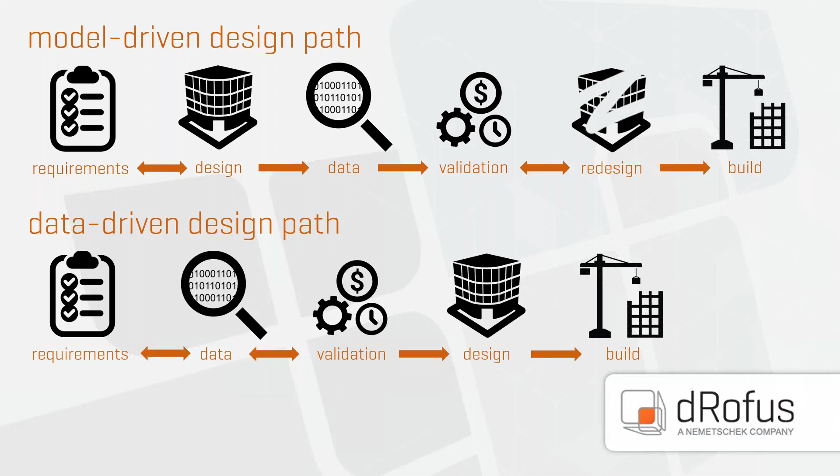I think what we're talking about now in the industry, and what dRofus does very well, is this idea of creating the data first, and validating that the data meets the project requirements before we start building models. So you'll see in the industry people starting to use Dynamo quite a bit, the concept of generative design—all of these are focused around creating information and then developing models off that information. Again, that's what we do really well.

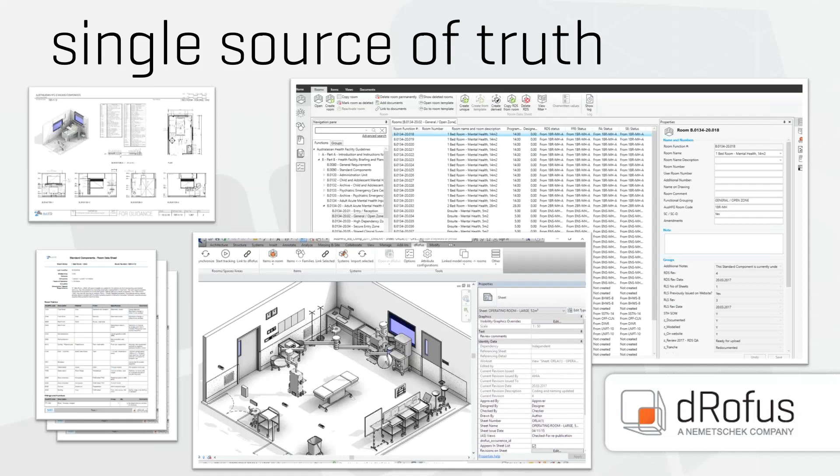What dRofus can be, and hopefully I'll show this to you in the demo, is we really want to be your single source of truth for information throughout the project lifecycle. So as various team members use different tools, the data is consistently hosted in a single location.

The way dRofus works is we're built on a bunch of different modules, and the various modules support different activities depending on your role in a project environment. We're not going to go through all these modules today. What we are going to focus on is some of the more upfront design-focused modules, because they set the stage and give you a taste of what dRofus can do throughout the entire lifecycle of the project. If there are specific modules you're interested in, we can follow up later with those demonstrations. As I mentioned, we want to be that single source of truth.

The way the software works, we are a cloud-based solution. Our licensing is structured so that any single user on any organization collaborating on a project has access to the same shared information. Based on user permissions, people can view or edit information based on how you define their access. At the end of the day, we want to be that connection either through open standards like IFC. We do a lot of importing and exporting with Excel, but we also have direct plugins to BIM authoring tools like Revit and Archicad. So regardless of the tools team members use, if they support open standards, we can essentially be that glue that holds the whole team together.

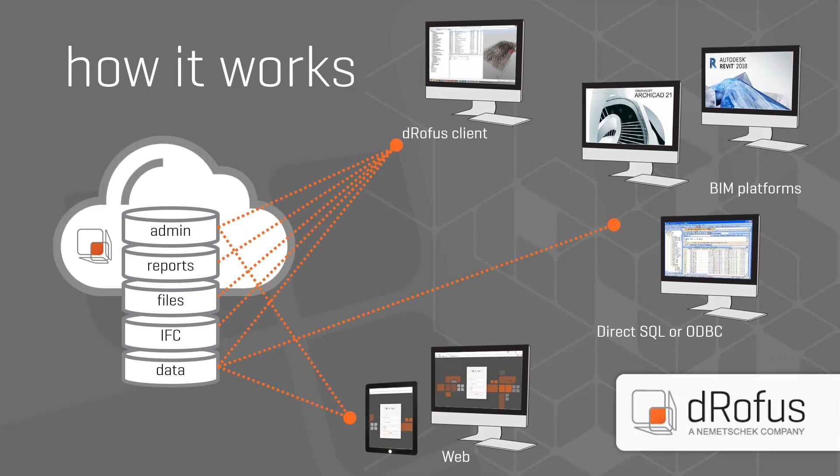The way our software is deployed is pretty simple. There's a desktop application that gets installed on every user's machine. When that desktop application is installed, it will automatically install the plugins for the various BIM platforms. There's also direct access to some information through a web interface, and we'll show you all of those in today's demo.

Okay, with that, I'm going to go ahead and get into the demonstration. So I'm going to close this down. You're looking at the home screen for dRofus.

When you log into your project, the home screen gives you some high-level project information, some key metrics in a project, and you can see the users that have been involved in this project. Off on the left are all of the different modules.

As I mentioned, we're not going to talk about all these today, but I'm going to start with the Rooms module. If I select that and open the Rooms module, this is the user interface, fairly consistent throughout all the modules. You'll see your navigation pane on the left, your ribbon on top, your main workspace in the center, and some dialog boxes out on the right.

At the core of dRofus is rooms. The way we work is you think about creating your rooms, defining where those rooms live inside of your building, and then defining what we call items, which in dRofus is anything that would go into a room: furniture, fixtures, equipment, mechanical, electrical items. You then assign those items to rooms inside of your program, and we synchronize all of that with your Revit models, and you can build on that information.

In the Rooms module, you can see in the navigation pane on the left there's the functional structure. This is fully customizable by every project team. In this case, we have departments and in some cases sub-departments. This can be customized - how these departments are named, numbered, the number of levels. You may have a multi-building project on a campus, so you can have a campus, each building, departments, and sub-departments inside of those. This is completely customized and defined by a project team.

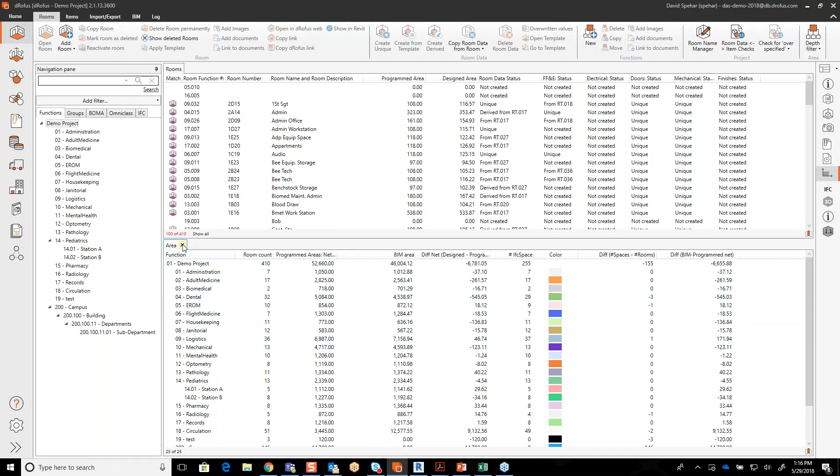I'm going to close that. Next, I'm going to talk about a different department. If I select any of these departments, you can see that I quickly isolate all the rooms that have been assigned to that department.

There are other ways of grouping rooms. We can group them by levels, or create custom grouping queries. Once you have all your rooms inside your project, you can create different ways of viewing and grouping them, but the most common way is by department.

If I select my department and open up my properties palette, I'm seeing the properties for this department, where I define the name, number, department gross, and area net factors. I can put in efficiency factors on a department by department basis, so for very early planning and programming, before I even build a model, I can look at what my net areas per department are versus my gross requirements. That's at the department level.

One common theme throughout dRofus is the ability to attach images and documents to just about anything in your project. In the case of our department, if I select my documents, you can see I have a PDF here, and I'll go ahead and open this up.

This PDF is the design guidelines for a dental office layout. So if you have your own standards, or a specific client with their own specific standards, those can be attached even at the department level, so as your team is designing a project, they can see what requirements they're designing against.

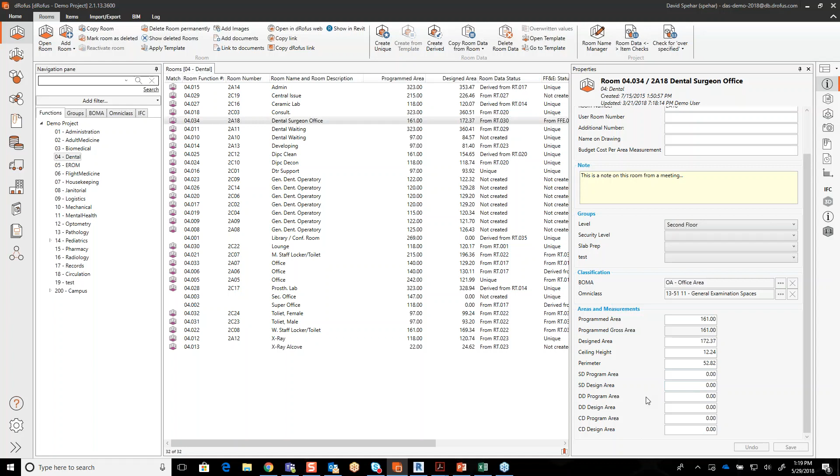That's the core properties for a room. I'm also going to open up my room data interface, and this is where you now start to capture all of your design and functional requirements for your rooms.

These tabs, the fields of information inside them, are also customizable and defined by you. So if you have your own way of managing and capturing room data, or an owner with standards for how they want room data sheets created, all of this can be customized in your project. You can see we're capturing various pieces of information, from the design build requirements to all the different mechanical and electrical systems.

So that is the room data for this room, and that's also the properties. I'm going to go ahead and open this room. When I open it, you'll see that it's just another way of accessing the properties, another way of accessing the room data.

We can also see we have images. This is the floor plan image of this room coming from the Revit model. So if I'm someone that doesn't work inside of Revit, I can now see how my Revit model is evolving, and as the person doing the planning and programming, I now have a direct connection between the two. You'll also see we have these other headings here.

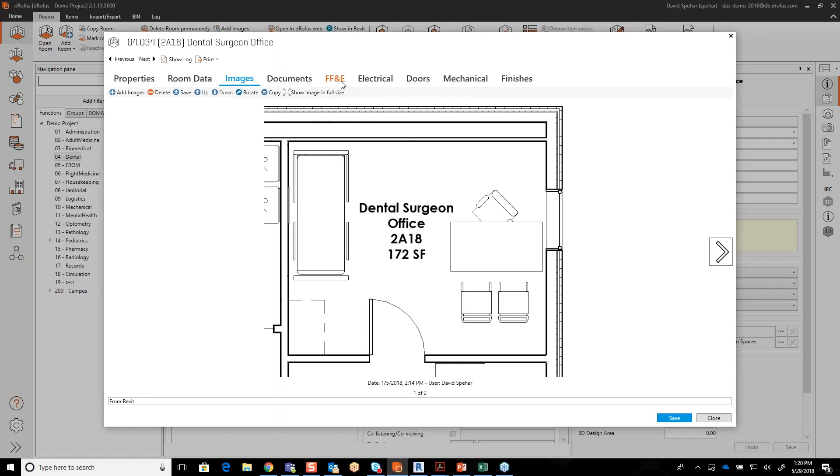These are what we refer to as item lists. As I mentioned, and we'll talk about items next, as you create items inside of your database, you then assign those items to your rooms. When you assign those items to the rooms, they're now tracked as part of the requirements for those rooms. So in this case, you can see this is all the FF&E planned for this room. If I go to finishes, you can see these are the finishes that are planned.

So now the various team members can start to define their requirements inside of a single platform. I'm going to go ahead and close that room information. The next thing I'm going to do is talk about items.

Actually, before I do that, I'll take one step back. Obviously this is a project that's fairly far along. There's basically three ways that you can create a project inside of dRofus. You can create it natively right inside of the platform. You can see right here, I can create new departments, new sub-departments directly inside of dRofus pretty easily.

I can also add rooms. I can add them from templates, which we'll talk about in a moment. I can just add a new room, or I can copy rooms if I want to. So there's a very easy, efficient way to build your program inside of dRofus.

We realize that not all teams work that way. I know there's a lot of people that still really like working in Excel and are comfortable in Excel. That's fine, we can import—as I mentioned before, we work with Excel all the time. So in our import-export utility, I can import rooms from an Excel file.

Basically, I can take an Excel file and then decide which of the attributes inside of dRofus I want to populate from columns of information inside of Excel. So it's very easy to bring this information into dRofus from Excel.

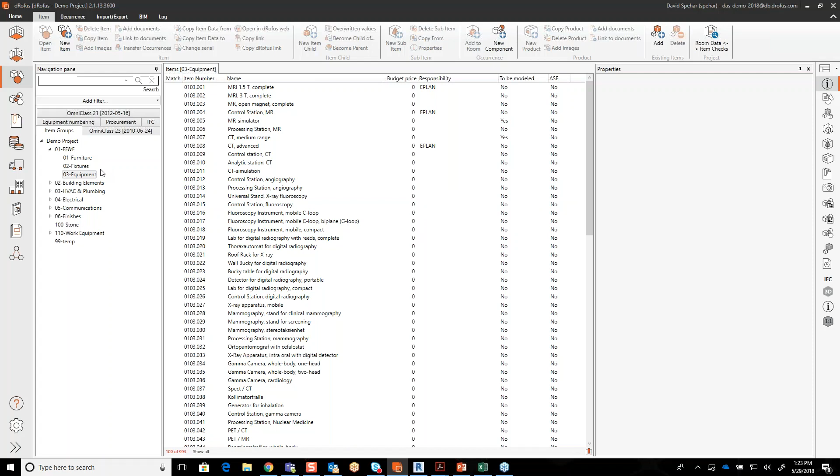Similar to the way we group rooms inside of our functional structure of departments and subdepartments, we can now itemize and define how we want to organize our items in a project. This is fully customizable as well, so you can have as many item groups and subgroups as you want. You can see in this case we've got the item groups organized by FF&E, building elements, HVAC, etc., with subgroupings underneath those.

So again, any one of these groupings that I select isolates the items that have been defined to be part of that item group. If I go into my equipment group, for instance, and select this CAT scan, you'll see that similar to the room properties, here's now the item properties. For those of you that work in Revit, this is very similar to looking at the parameters or properties for a family.

So in this case, I have my item name and other pieces of information, like budget price. This is great because you can put in a budget price for every piece of equipment or every item in your project. Every time that item is assigned to a room, we track that and you can report on it. So you can start to get very reliable budget gut-check pricing information based on the budget you define for items and where those items are placed inside rooms. This can become a very powerful tool during design for rule of thumb cost validation.

The other attribute I want to note here is this 'to be modeled' checkbox. This is where we decide how you want to relate items in dRofus to families inside your Revit model. If you want this item to live as a physical piece of content and geometry in the Revit model, you select 'to be modeled.' What's great about this is it allows teams to be more strategic in their modeling. A lot of people model everything just to create schedules in Revit - I was guilty of that myself. But there's stuff you may not want or need to model, yet still want to track as part of a room. In that case, you don't have to check it to be modeled. Things like artwork or a trash can, items that aren't dimensionally significant but still need to be purchased as part of your project. So we give you the ability to be strategic in what you choose to model.

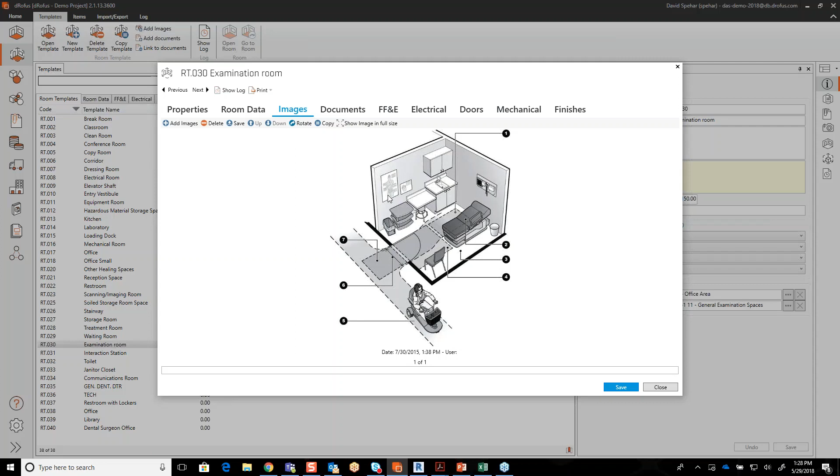I can also attach images and documents. So maybe I want to attach an image that is the standard layout for this type of room, whether it's from a design manual, hand sketches, anything you can create an image file for, you can attach as a standard image for your templates. I'm going to close that. In addition to my room templates here in the template module, there were all of these other item lists.

So now I can start to template the items that get assigned to rooms as opposed to just doing it manually. If I open the template for my FF&E, here's a dental office FF&E template, which says this is all the equipment from an FF&E standpoint that should be assigned to every single dental office. So now you can standardize not only your design and functional requirements for your rooms, but also what goes into those rooms.

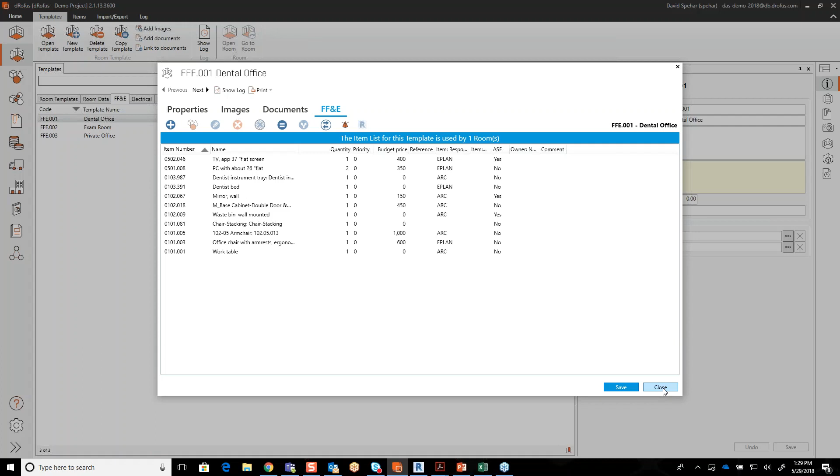You see there's FF&E. We also can do that at the finishes level, so I can start to template which finishes I want to associate with my rooms. I'm actually going to show you that now.

If I go back into my rooms module, I'll close down the room, actually let me keep the room data open. Now if I select this handful of operatory rooms, you'll see my room data interface shows that this hasn't been created. In my workspace, it shows all these columns of the status of these different item lists, and in all of these it shows it hasn't been created.

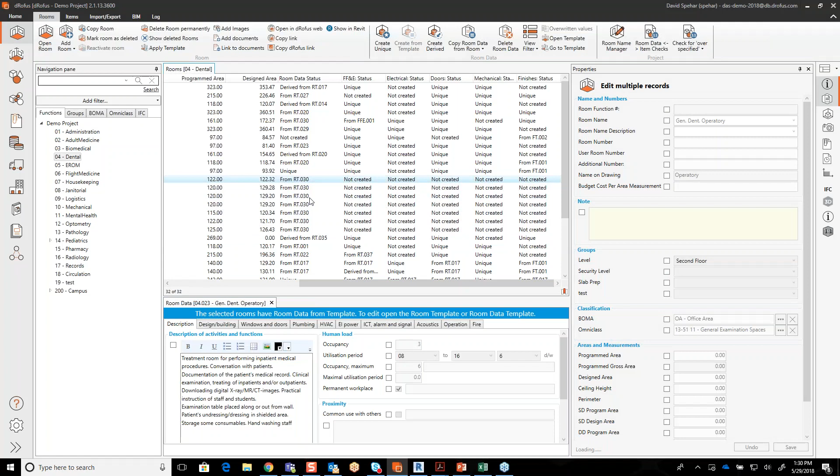So for my room data, I'm going to select Create from Template, and now it brings up my room templates from the other module. I'll scroll down and select this examination room. Now you'll see the status changed from not created to being driven from a room template.

If I double click to open this room, you'll see there's my room properties, there's now all of my room data showing it's coming from room template 030. My images now show the floor plan of this room coming from the Revit model, but there's also the image showing the design standard.

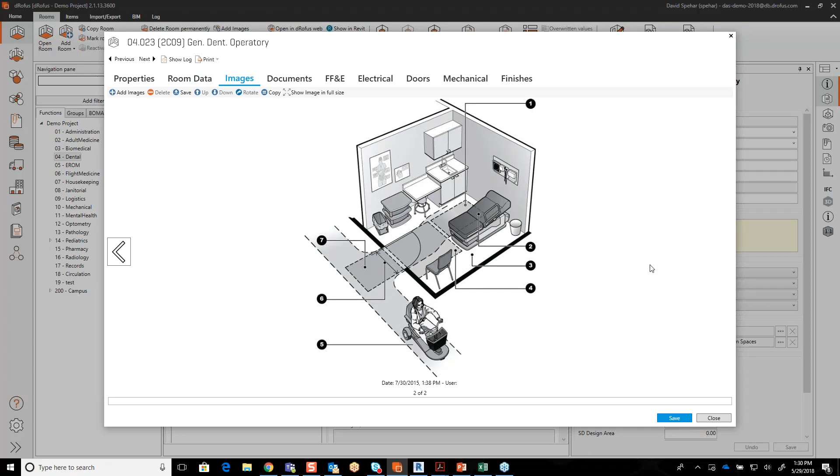So again, as a non-Revit user, a planner, architect, project manager, owner, or contractor who needs to make sure the models are evolving to meet the design requirements, they can see all that inside dRofus without ever having to open up a Revit model.

In addition to that information coming from the room template, if I select my FF&E or finishes, you'll see it showing the status—they haven't been created yet. So I can create unique, which means I'm just going to define this as a one-off room, let's say a lobby or something like that.

I can derive it from another template, or copy it from a room, but in this case I'm just going to create this also from a template. So I'm going to go to my finishes and grab my dental office template. Now when I select that, all of those finishes we've defined in our template get pushed into these rooms. It's a very efficient way to create your design requirements and associate that with all of your rooms in your project.

One other thing I want to show you before I jump into the Revit side of things: if I open up my room template again, we track every move people make inside of the database, which is super handy because now you have an audit trail and the ability to see how your project's evolving.

Even if I select this room template and go to show log, it's going to show me the history of every change that has taken place in this room template since it was created. It shows the fields that changed, old versus new value, when they changed, and who changed them, giving a summary of all of that.

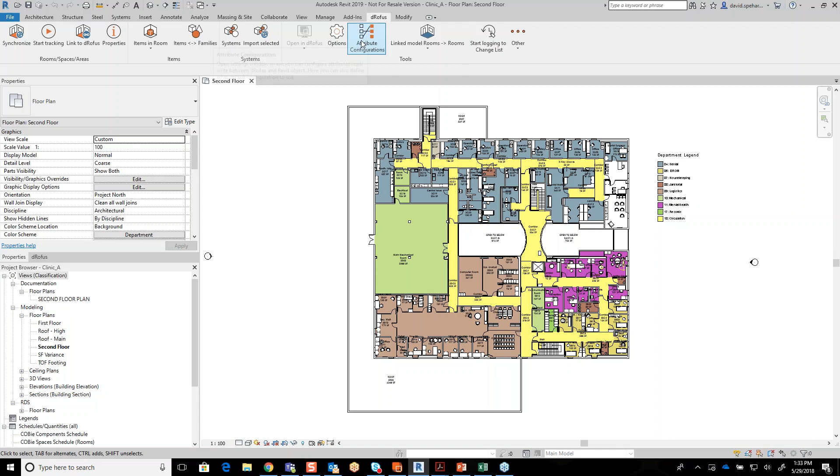Now inside of Revit, when you get the desktop application you'll also get the dRofus plugin. The first thing I'm going to show you is the attribute configuration, which is where we decide how dRofus is going to communicate with Revit. Your BIM manager, or whoever the data manager may be, will define all of these for the project team.

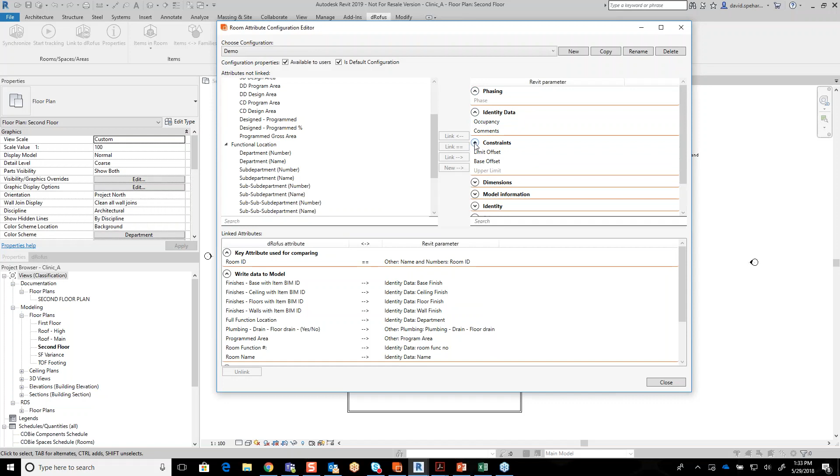I'll start by showing you the Revit room to dRofus room attribute configuration. Here you'll see all of the dRofus attributes on the top and on the left, and on the right all of the Revit parameters. These are Revit parameters—either out of the box, shared, or project parameters—and as long as they're associated with rooms, we have access to them.

On the top we show you the parameters that haven't been connected, and on the bottom we show you your current configuration and which way the information is flowing—all the data we're writing to the model from dRofus, and all the data we're writing to dRofus from the model.

In this case, we're pushing our finishes information, department, and program area into Revit. But on the Revit side, we're pushing the actual area of the room, the level of the building, and the dimensional data back into dRofus.

You can create multiple configurations. As mentioned earlier, one way teams start a dRofus project is by building a conceptual Revit model and pushing fields of information from Revit into dRofus. You can have a configuration that does that, then save it and create a different one that pushes the data the other way—supporting different workflows for how data flows back and forth between dRofus and Revit. So I'm going to close that.

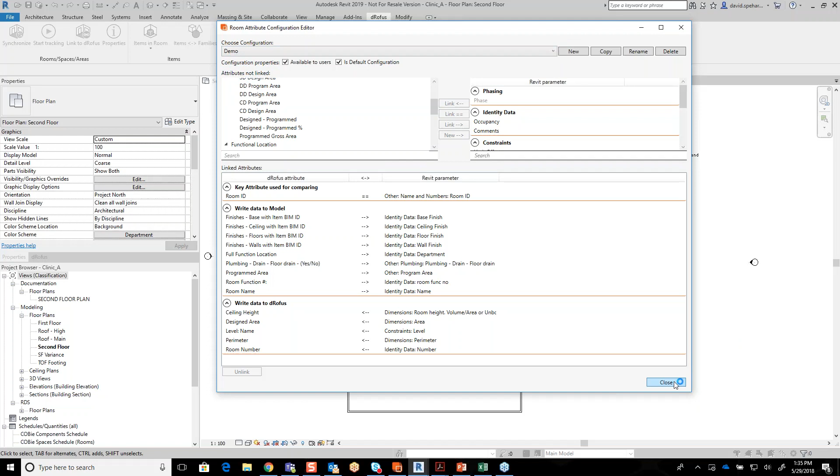The same holds true for Revit systems, families, and areas—I'm not going to show you those right now in the attribute configuration, as they're all fairly similar. What I do want to show you is a couple of features of how we interact with Revit in both rooms and items.

I'm going to zoom into this corner of the building. You can see we have a few rooms that haven't been placed yet. Now I'm inside my architecture tab, and I'm going to go ahead and place a room.

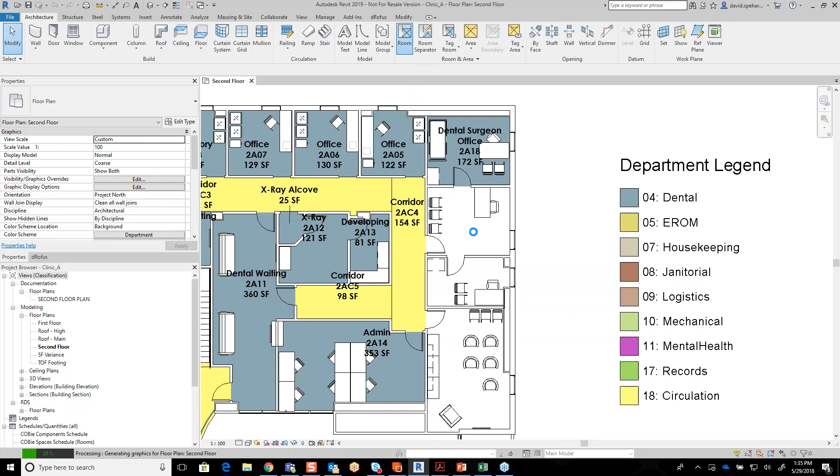When I do that, we intercept the Revit room command and bring up our own dialog box. You'll notice on the left is the functional program, so there's all of our departments, sub-departments, etc. Inside of those, as you select the various departments, we will show you which rooms haven't been synchronized to a Revit room yet.

If you think about the different workflows, if you start building your program inside of dRofus before building Revit models, which in many cases may be the ideal, you now can make sure that every room you place inside of Revit is part of your program. In this case, you could see that in the dental department, we have 3 rooms that haven't been placed yet. So I'm going to grab this room and I'm going to link it.

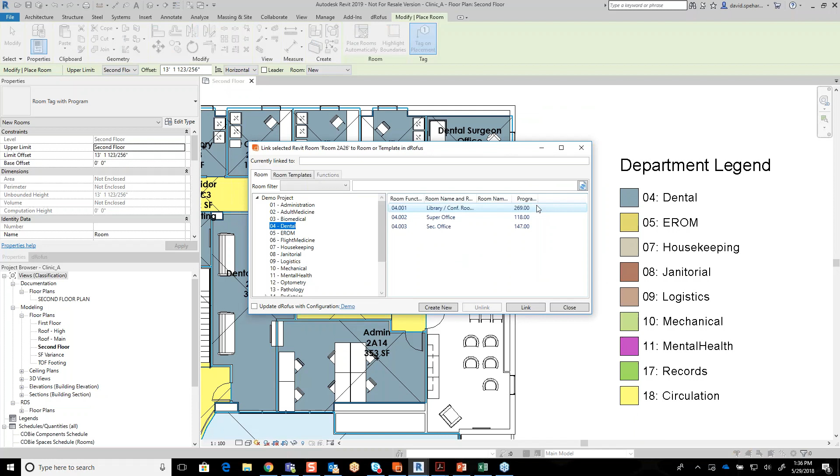And now when I do that... I'm going to close that. Uh-oh. Well, that's always fun. Don't you love a demo? There we go, not sure what happened there.

Okay, apologize for that little hiccup. I am using the beta version. Unfortunately, I shouldn't be, but that's what I have on my computer.

But as you can see now, when I place that room, if I go ahead and select it and look at its properties, this is all the information that we said we're going to push into Revit from dRofus.

Now what I can also do is, if I go back to my dRofus tab, you'll see there's the properties palette here. If I open that, now what I have is the Revit properties palette that shows me the Revit side, but I also have the dRofus properties palette that shows me the information from dRofus, and it's showing me arrows that identify which direction the data is being pushed and pulled. So now as a user, I can see which fields of information are actually synchronized between my Revit and dRofus models.

The other thing I'm going to show you here is if I select this room and go to the dRofus interface, I'm going to select items in room. This brings up a dialog, and remember that to-be-modeled checkbox? Any item selected to be modeled has been mapped to a Revit family, and now it's showing me the status of the design of this room.

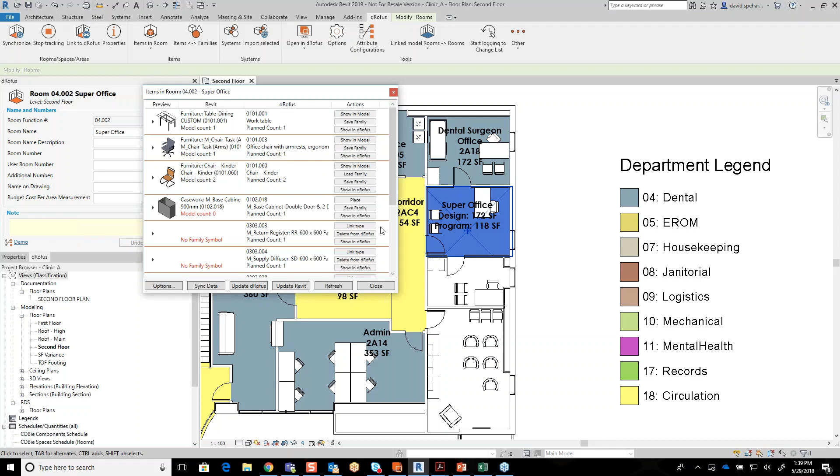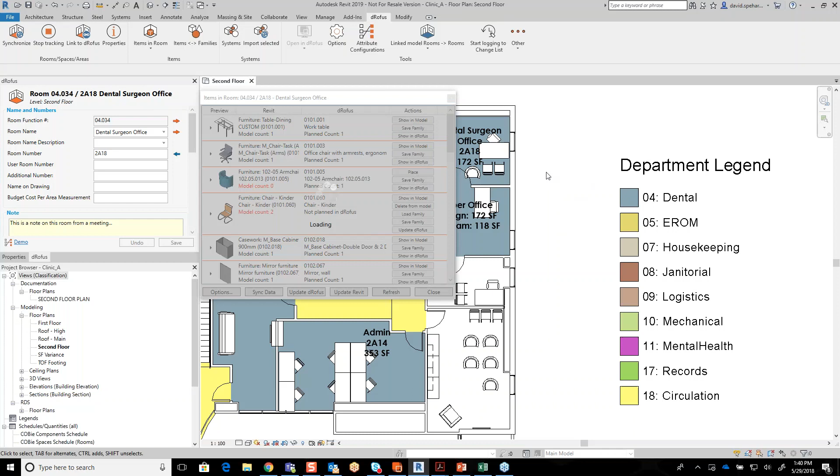Similarly, we can actually place the content as well. So if I go to this room, for instance, and go to items in room, you'll see that we have 1 chair planned and none in the room. I can go ahead and place it, and it will basically do the same thing where it synchronizes the 2 databases, and now it's going to show me that our model count matches our plan count.

Obviously, the chair doesn't belong there, but I can move it once it's placed. This is a very powerful way to make sure that you're validating that what is required for your project is inside of your rooms.

This can also be done with items in room for that specific room. You can see we can run this check across each level of a project or across the entire model. I'm not going to do it right now because it will take a few minutes, but you can run it across the entire floor of a model and export that to Excel. So there are a lot of ways that you can access and validate the information.

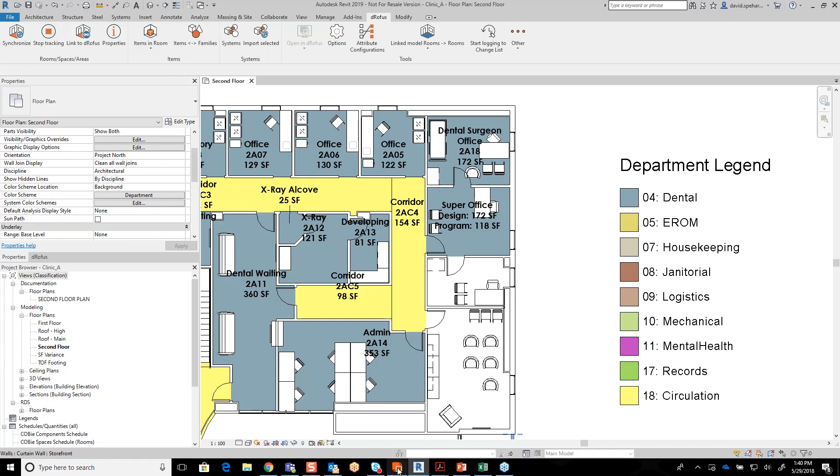All right, with that, I'm going to go ahead and jump back into dRofus. Speaking about reports, I'm going to now open up our reports module. Inside of the reports module, I mean, this is great—we're capturing all this information inside of dRofus. But what if I need to report it out?

We offer the ability to create a lot of different types of reports. We have a lot of out-of-the-box reports in PDF, Excel, and Word format, but you can also create your own custom reports for your project in any one of these cases.

But I'm going to go to my PDF reports for rooms. A very common one is creating room data sheets. If I go to my PDF for room data sheets, I'll go to room function, and I'm going to grab my dental department, for instance. I'll select OK and generate this. So now you'll see that we are running this PDF report, and let's see how quickly this moves.

All right, so it ran a 103-page PDF report in maybe 5 seconds. I'm going to open up a page of this that has been isolated so we could talk a little bit more about it. So this is that out-of-the-box room data sheet.

In this case, you'll see at the very top, if I zoom in a little bit, there's all of our core information about the room—the programmed area, the actual area, etc. Each one of these headings in the room data sheet is the various tabs that were inside of that room data interface, and all the fields of information we were populating are now captured inside of your room data report, your room data sheet. So you can see here's our windows and doors, plumbing, etc., HVAC.

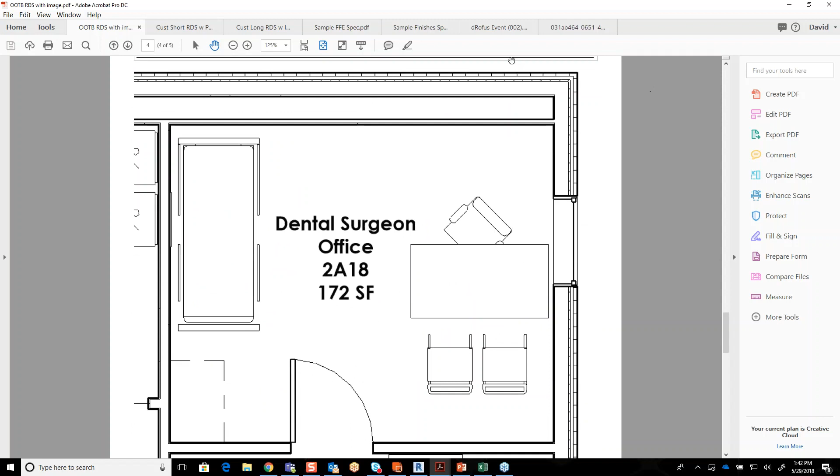But not only do we capture all the room data requirements, but we can also capture your images. So there is that floor plan image, as well as the design standard for that room. So your room data sheets now can become these very powerful tools that are tracking all the room requirements, as well as the graphics for the rooms.

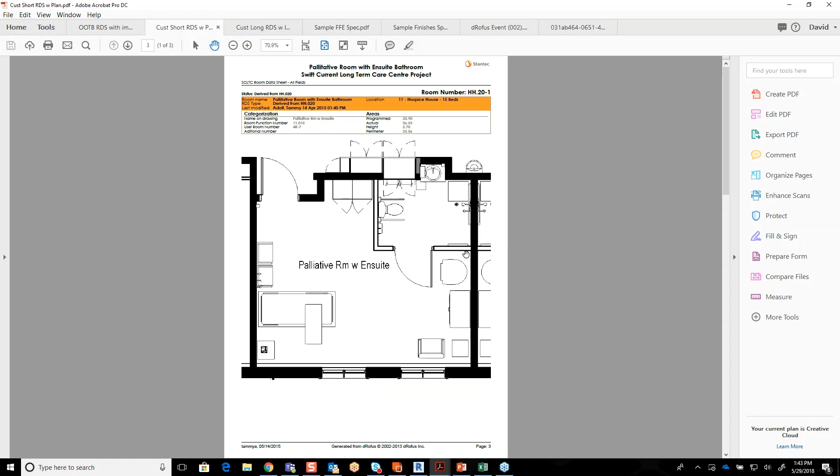Here's an example of a customization, because you can customize these room data sheets. This is a sample from Stantec. You can see that they inserted some of their branding and how they wanted their floor plans to look. So there's all of their room data.

In addition to all the room data, you can see on the bottom here, this FF&E, and the next page FF&E—you can actually embed your equipment lists inside of your room data sheets. So now I can print out a room data sheet that shows me all of my design requirements. It could show me my floor plan layout, as well as all the equipment plan for that room. Again, there are various ways you can customize these.

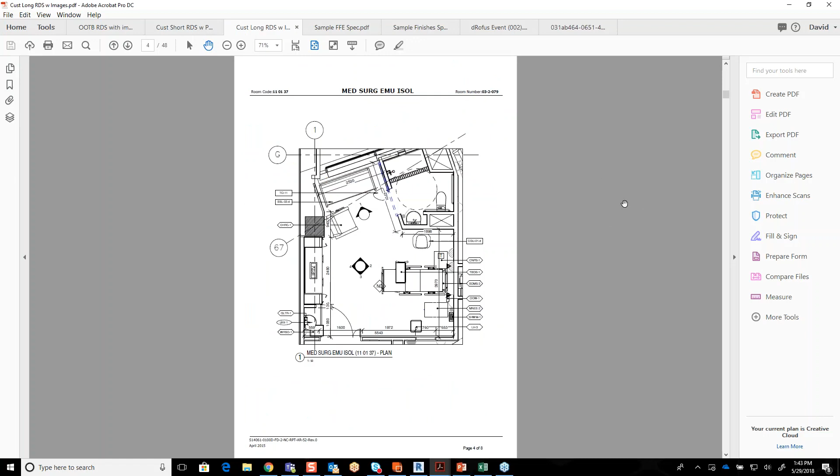This is a really long one for a mega project in the Middle East. But what's interesting about this is they almost use these to supplement construction documents. So there's a floor plan, ceiling plan. Those images we create for you, but in this case, they also chose to embed interior elevations and axonometrics. These are all views inside of Revit.

So you can basically create them, apply view templates, annotate them just like you would any Revit view. The next time you synchronize and run the report, it's going to give you an updated version. So these are basically live representations of how the Revit model is evolving.

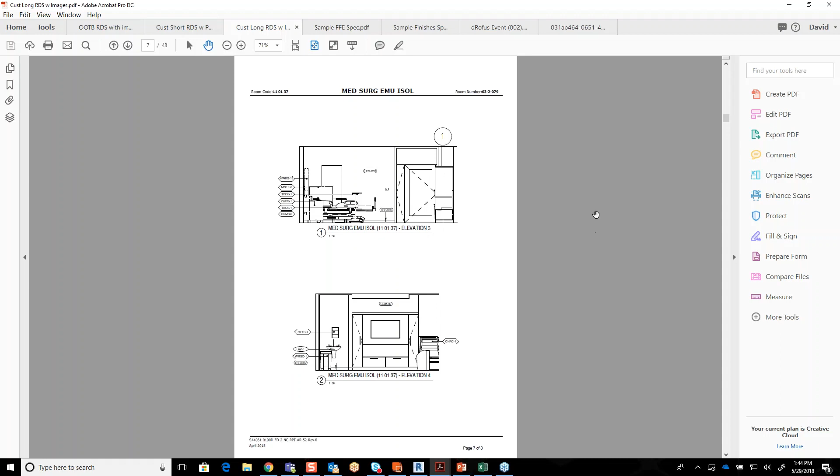So all of the annotations and tags inside of this room data sheet are actually coming out of the Revit model. If those families are synchronized with the dRofus items, you now know that all of your annotations are correct. In addition to the room data sheets, we also have the ability to create FF&E specifications.

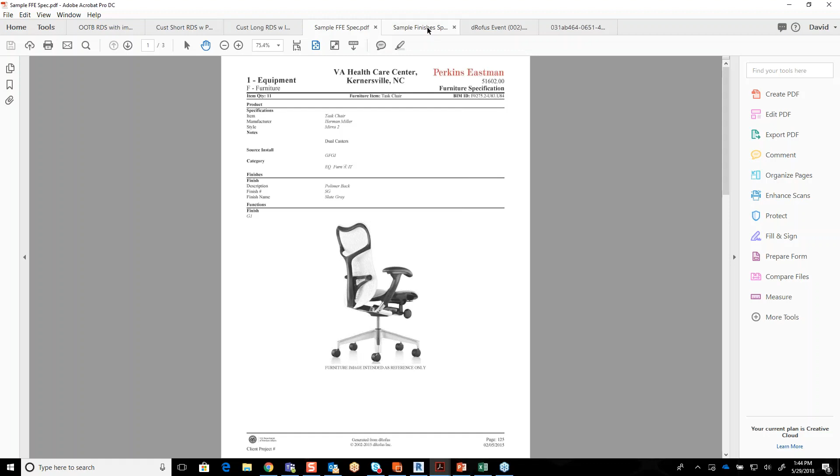As I showed you, the ability to attach images like that CAT scan - you can attach images to your items and you can run FF&E specs. You can also run finish specs. So there's a lot of different ways that you can run different PDF reports.

When you have this formatted the way you want, you can save this Excel file back to the project. The next time we run it, all we do is we refresh the data, and it just updates all of the data inside of your pivot tables, etc. So this becomes a real efficient way to standardize reporting.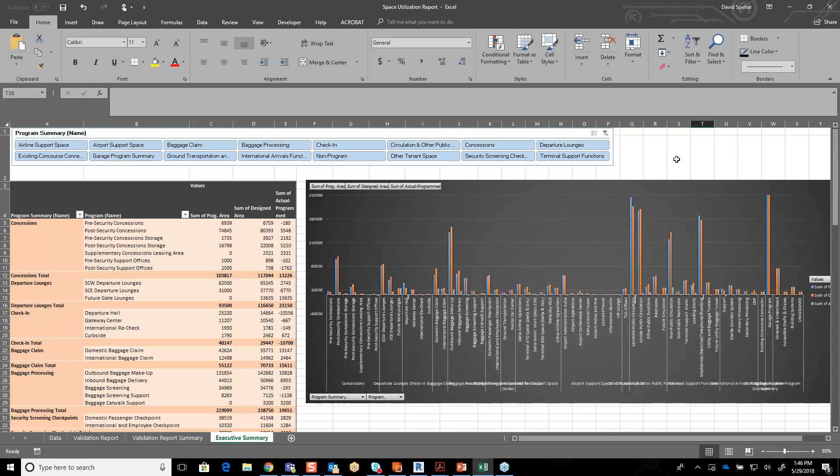We also have some clients that are starting to leverage tools like Tableau or Power BI to do some pretty cool data visualizations. Essentially, all you have to do is do your Excel export, create the connection to Power BI, and then you can just refresh the data. So that's a little bit of a summary of creating different reports inside of dRofus.

One other thing I want to jump into inside of dRofus before I show you the web interface is I'm going to go back to my rooms module. Let me close a couple things down here. I'm going to open up my IFC viewer.

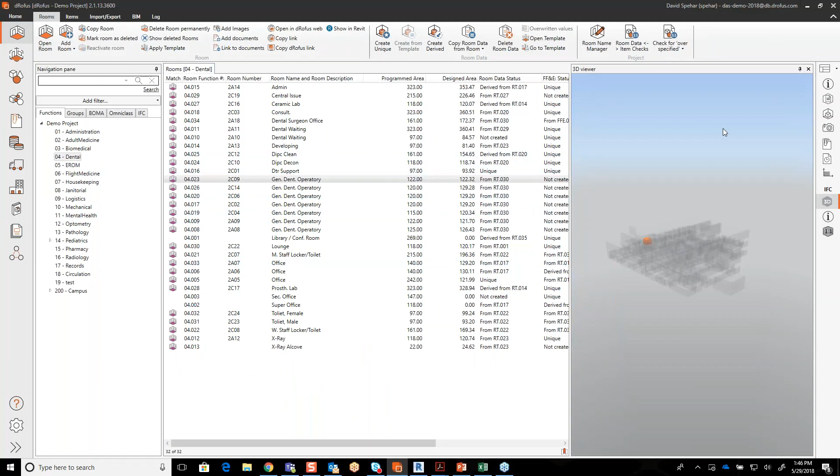We have an IFC viewer directly inside of dRofus, and inside of this is basically a way to now aggregate models from various sources. So most teams work in Revit anymore, but if you have a consultant that's using a different file platform authoring tool, we can aggregate IFCs from all different design softwares or construction softwares.

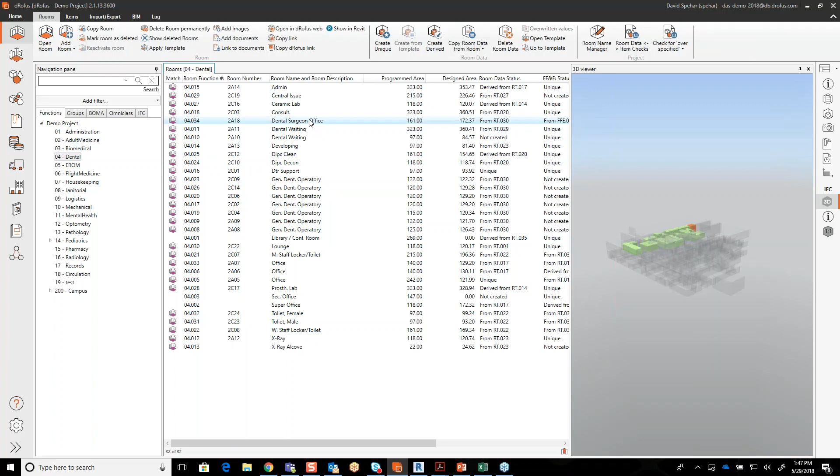So in this case, you see this is the IFC of this Revit model. As I select different departments, it's going to highlight the departments inside of the IFC. If I go ahead and I select a room, it's going to highlight the room directly. If I double click on the room, it will take me there.

So now I'm seeing the IFC version of the Revit model directly inside of dRofus, the ability to visualize what's happening inside of the models without actually having to open up an authoring platform. Then if I select on this occurrence tab for this room, it's similar to showing me the items in room inside of Revit - it's now showing me the same information, but on the dRofus side.

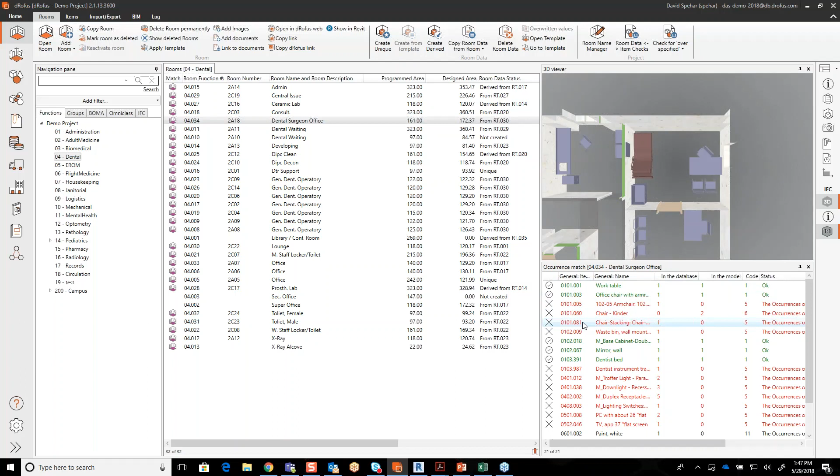So it's showing me where items are synchronized, the items that are not synchronized. So we give you the ability to view that on both sides of the equation. We feel that's a pretty powerful tool for the non-Revit users.

Last thing I'm going to do is, I guess the one thing I should mention here is there's a lot of information that you're seeing here, and some of you might be thinking, wow, this is really overwhelming. It can be, but one of the things that you can do is we have an admin console, an admin web console where you create your users. But in addition to creating users, you can create permissions and what people have access to edit and view.

So because I'm demoing this, I'm showing you everything, but I can actually turn these various features on and off. So if a user only has a specific role on a project, I can turn off the modules so they don't even see these modules when they log in. And then as far as like the room data, for instance, I can also set it up so that users can only see specific pieces of room data.

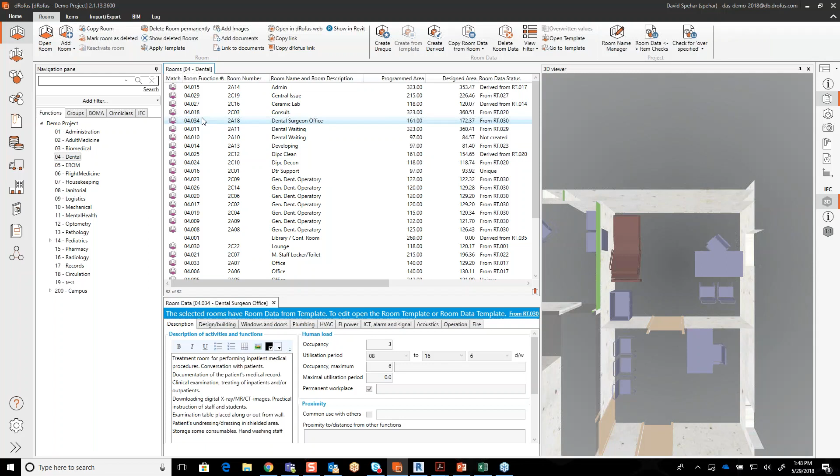As a matter of fact, let me open this room so you can see here under view filters, we can create filters for the various roles. So in this case, if I go to the engineer's view filter, I'm only going to see the tabs that are for engineering. This can all be set up in the admin console, so when your users log in, they're not overwhelmed with information they don't need to interact with.

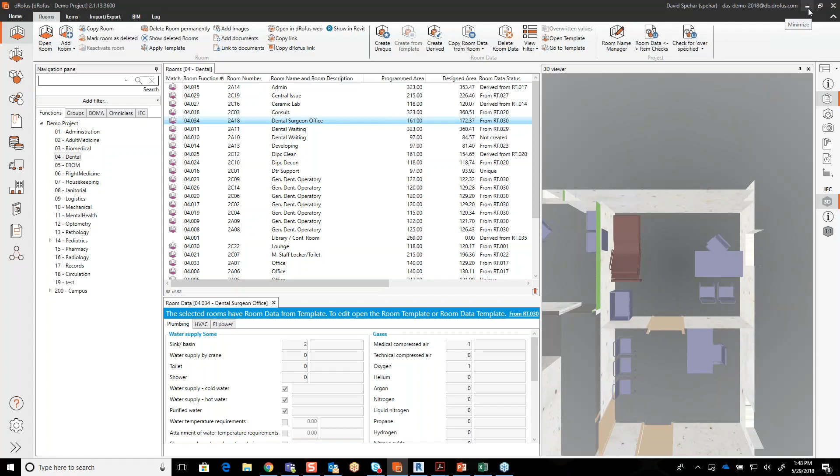All right, the last thing I want to do here is jump into the web viewer. The web viewer is constantly evolving, and we're going to see more enhancements throughout the course of this year. Basically, when you log into the web viewer, the home screen for the web is very similar to the home screen of the client. You can see some general project statistics.

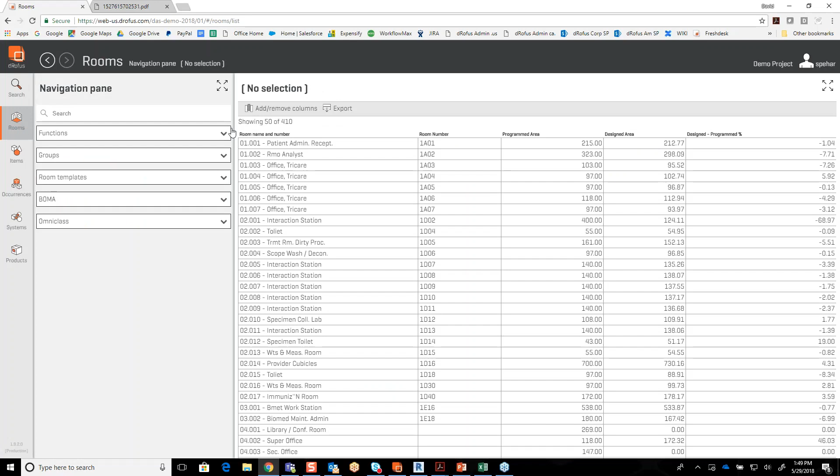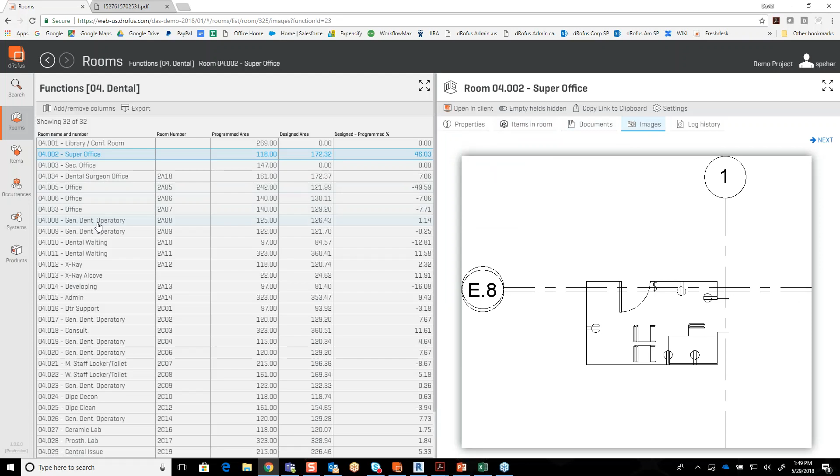If I open up the rooms module inside of the web viewer, I now have the ability to take a look as an observer. I want to go to that same dental department, let's pick on our dental department again, and go to that super office. When I go there, it's going to show me all of that room core information, the items currently planned for the room, and the images. Oh, that's an ugly one, let's go to a different one. Yep, so it's going to show me the images.

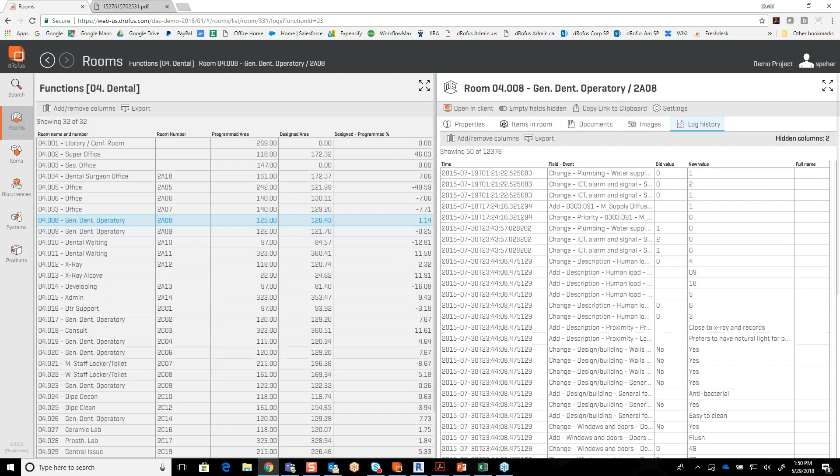You can also see that I have the log history here as well. So inside of the web viewer, for team members that don't necessarily need to edit the information but need to view it, this is a great way for them to access the project directly. You can see the ability to copy link to clipboard. So for this particular room, if I had a concern about it, I could come down under my notes and make some comments about my thoughts on this room. Then I can select copy link to clipboard and email that to another team member so they can open it inside of the client, see what changes need to be made, and make those changes. The same holds true for items, etc.

So we've got all of the various modules accessible throughout the web viewer.

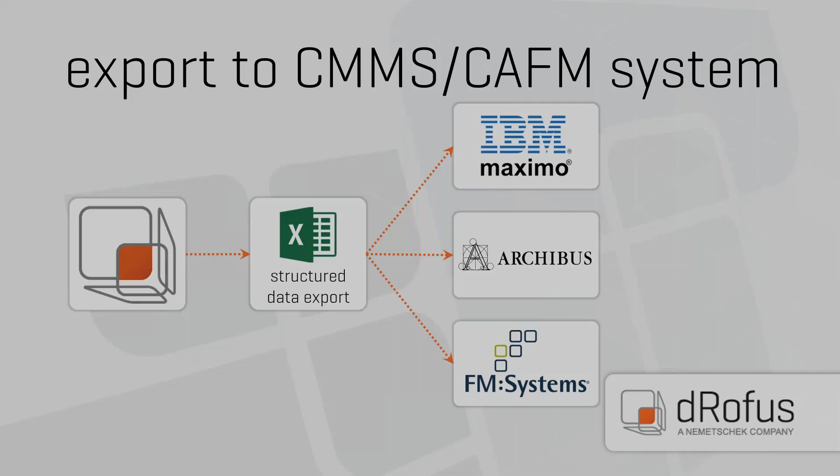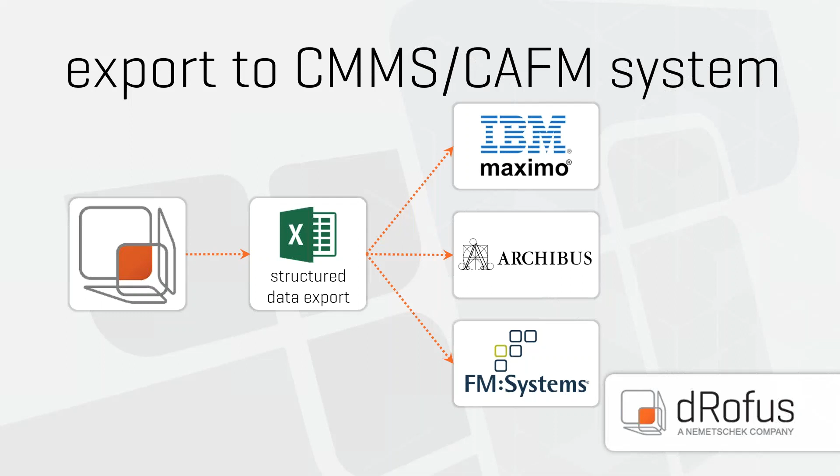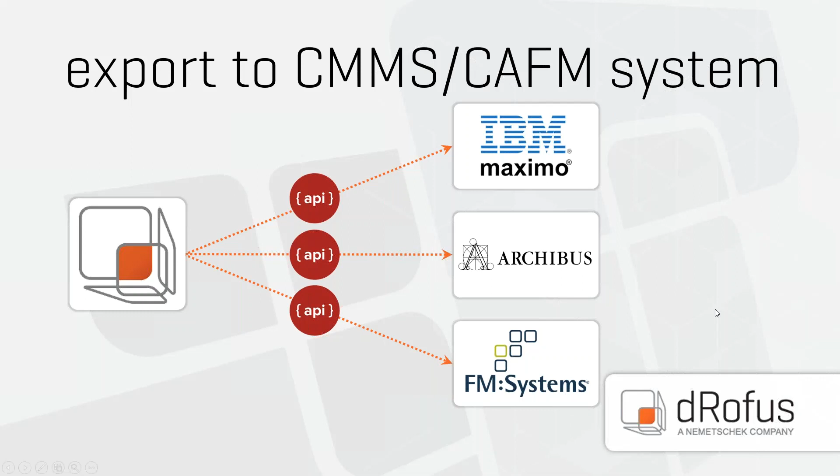What I want to do now is wrap up for those on the call interested in what we can do with this design information downstream. Because we support managing the information of a project throughout its life cycle, we can connect to facility and asset management platforms. We are not an FM platform ourselves, but we can be the connection between the design information and the long-term management of the facilities. The most basic way to do that, as I showed you, is through our ability to import and export Excel, a structured data export. But we also have an open API, so we have the ability to create direct connections to these FM platforms. There are a couple we're currently connected to in Europe, but if there's a need, we have the ability to talk directly to FM platforms.

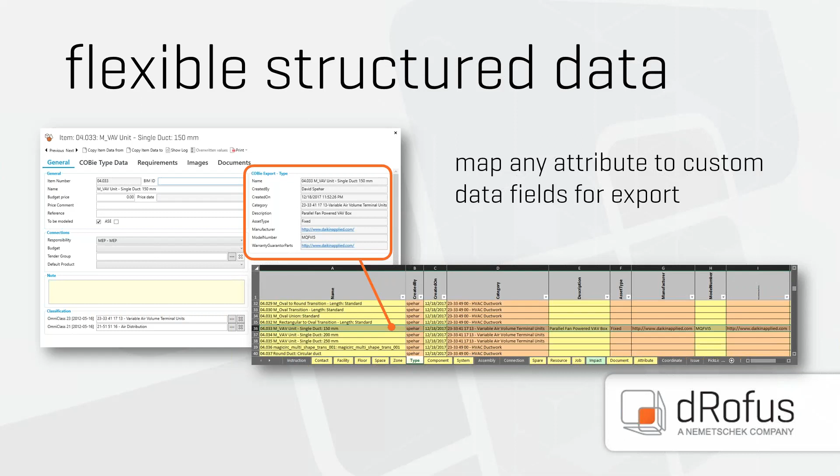One of the benefits of dRofus is the ability to create what we refer to as flexible structured data. All of the information you're capturing inside of dRofus, you can map any attribute you want to custom data fields that you create for standardizing exports. In the case of COBie, you can create a series of COBie export fields, and those can be mapped to whatever fields are correct based on an owner's requirement for that project. So you could standardize your ability to create a COBie export or deliverable, but that allows you to map those fields to whatever attribute inside that dRofus project is what that specific owner or client wants. So it becomes this very powerful tool. I know COBie is becoming a very popular request for data handover.

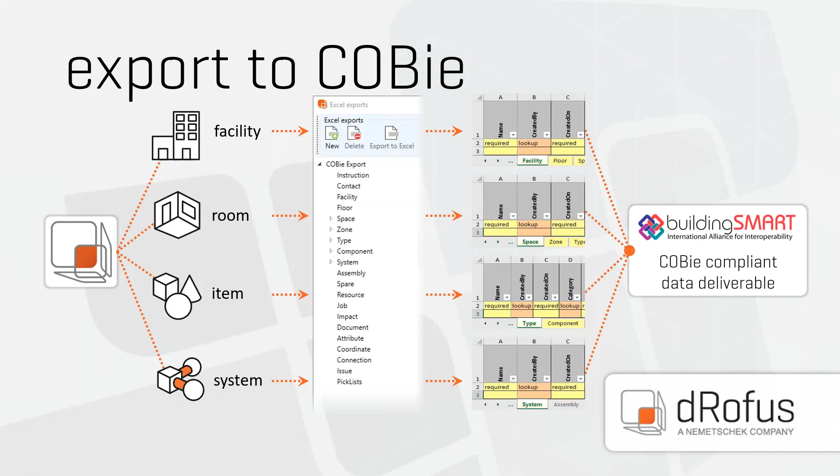So this becomes a very powerful way where now inside of dRofus, you can map all of these various attributes from the various aspects of your dRofus project to COBie. Really, the way this ultimately works with this kind of data collection is that any team member on the project has access to the shared data inside of dRofus, even those who may not be able to access the Revit models.

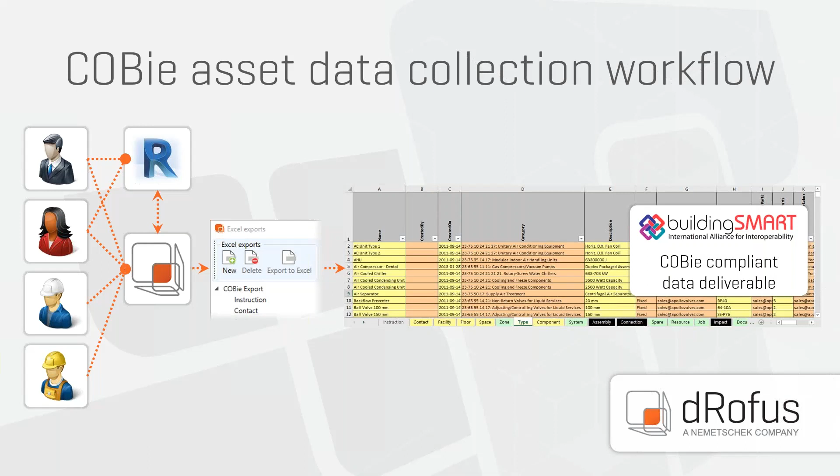Through our attribute configuration and synchronization with Revit, we allow all team members, contractors, trade contractors, designers, planners, and owners to collaborate and add their information as it's known inside of dRofus. We synchronize that with the Revit models, and the actual handover, in the case of COBie for instance, comes directly out of dRofus, validated and synchronized with your Revit models. Ultimately, you can create a true record model or a true data deliverable.

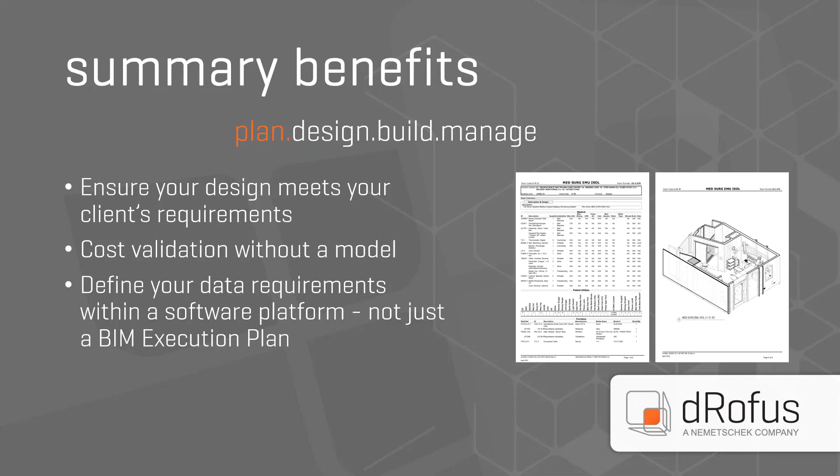So just a real quick summary. Throughout the project lifecycle, I hope the demonstration I gave today touches on some of the benefits you can see during the early design or early planning phase. What's powerful is the ability to ensure design meets requirements, and it doesn't have to be done inside of a model, but inside of a collaborative database.

Once we move into design, you can start to leverage the dRofus data along with your Revit models. This is where you can see the power of making sure what's in the models is what's supposed to be in the models. This becomes a valuable tool to ensure projects aren't creeping out of scope, and costs aren't getting out of control because models have too much information or too many families where they weren't supposed to be planned. It gives you the ability to do validation during design.

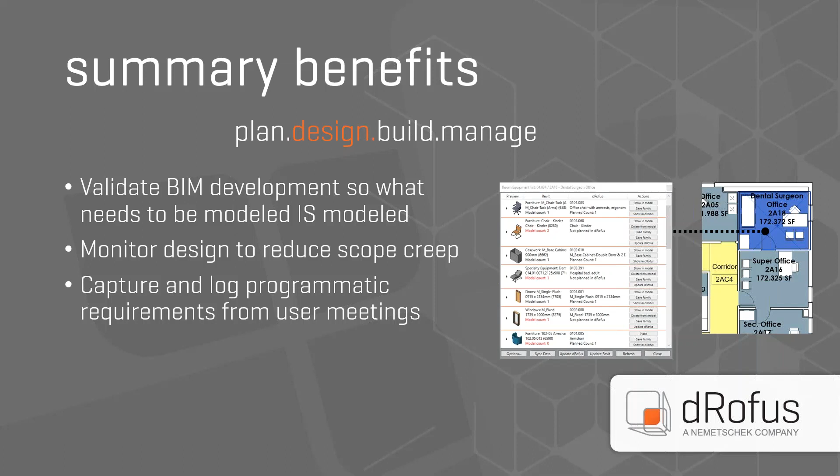During the build phase, we see examples like Walsh Construction using customized room data sheets in construction to create punch lists. They tape paper punch lists to all the doors in rooms using room data sheets for the whole design and construction team to sign off on punch listing. There's a downstream value to all this information during construction, because now you can validate that what is being built is what was planned.

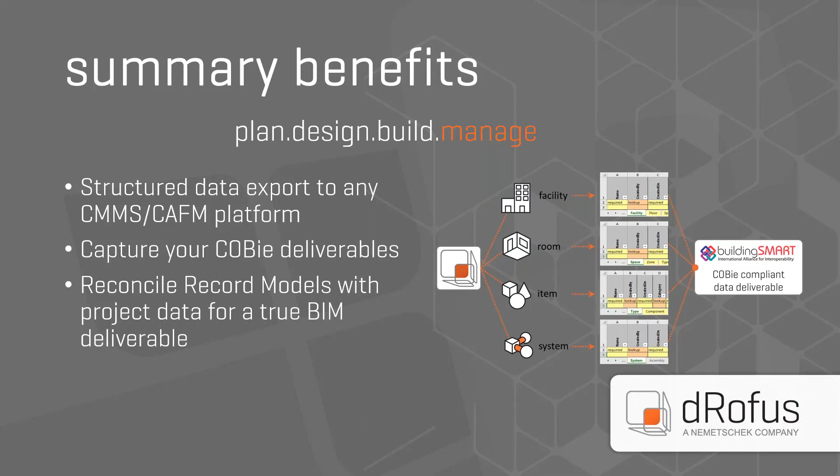And then finally, on the operations side, because of our ability to create structured data exports matching any type of data requirements, we become a solution that supports your ability to define project requirements at design, validate that all the way through construction, and then provide a true data deliverable at handover.